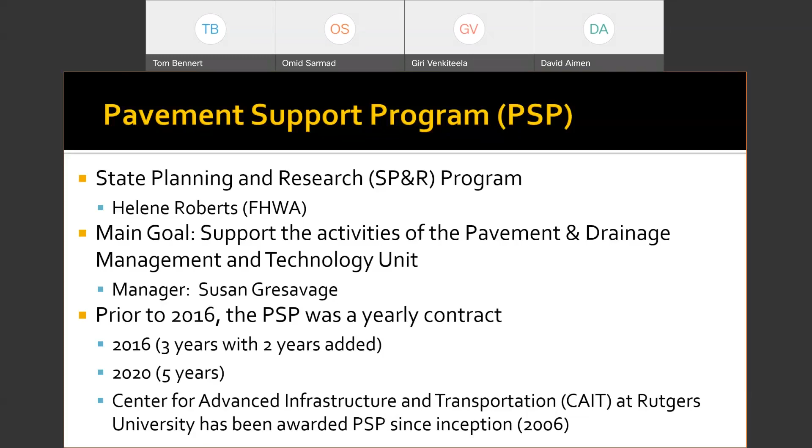As we've mentioned a couple of times, this is an extension of the DOT's services. We're not trying to push any agenda except what DOT wants and needs. That's really the idea.

We meet formally each quarter to discuss progress, but I spend a lot of time with the staff throughout the week, whether that's with Zoom calls or Microsoft Teams, or going out into the field looking at pavements and construction processes. Two of our people, John Henkin and Michael Boxer, are actually at New Jersey DOT two to three days per week, working with the staff intimately to make sure everything we're doing meets their needs.

When we talk about deliverables, a lot of these come in the form of technical memorandums completed upon a subtask. We've got seven major support tasks here, but within each one we have subtasks, so we may have three different mini projects going on in innovative materials within one year. As these things get completed, we're immediately providing information to the group so we can make very quick decisions.

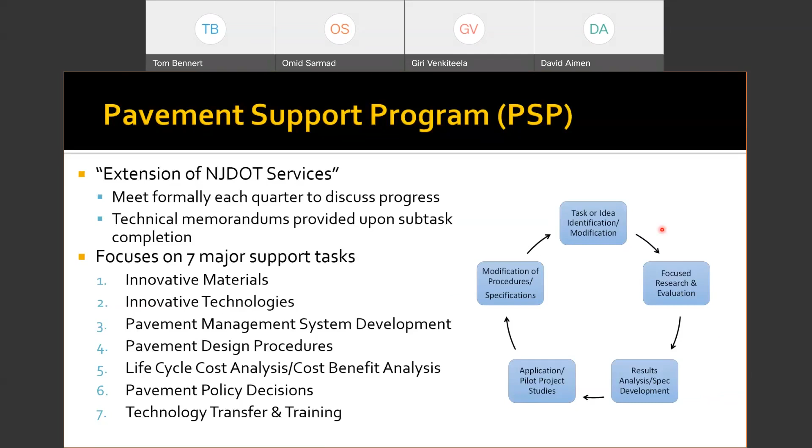And then we go back into this cycle again - this is a never-ending process. We're always looking to improve, always looking to make things a little bit better, always trying to see how specifications can progress, because as we all know, the industry is quickly changing. Material processing is changing, construction practices are changing, analysis programs and computing power are changing. So all of these allow us to continue to progress.

You see this trend on my kids' TikTok or Instagram or Twitter, how it started, how it's going.

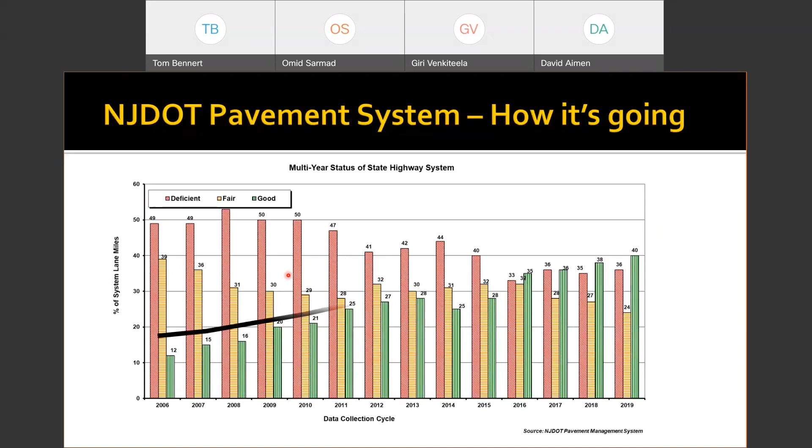And then you move forward to see how we're doing now. What you'll see is a nice increase, a nice improvement over this time period. Again, looking at where we were at 12% good, up to now at 40% good, and constantly moving that up.

You can see here in these last 4 years in particular, we've actually had more percent of the pavement network that was in good condition than in poor or deficient condition. A lot of that has to do with some of the work that we're doing, some of the philosophies that we're helping New Jersey DOT implement and move forward. I can see this constantly going upward with how things are going.

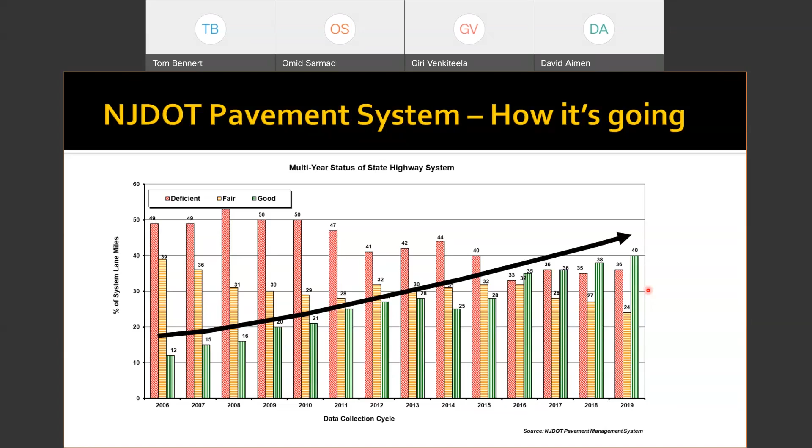Very proud of this particular schematic because, from a research perspective, it really shows whether these programs that New Jersey DOT utilizes work. I think this shows a lot of evidence that what we're doing is making a big impact in the state. From working with this program for this number of years, this is one of the biggest takeaways that I am very proud of, and it clearly shows the impact and value of these sort of programs.

Okay, so let's get into some examples of what we're talking about here. We're going to bridge a large gap going from materials to training. I'm going to try to give you a quick flavor, almost like a beer flight, giving you a little taste of everything—an idea of what we've done, what we're working on, and what we're moving towards in the future and in the coming years.

So what's innovative materials? What exactly are we talking about here? Well, the idea behind innovative materials is we're looking to develop new specifications for quote-unquote 'new' construction materials. I put that in quotes because sometimes new may actually mean recycled—taking something that's old but finding a new use for it. So we're looking for new construction materials that are going to improve the life of our pavements.

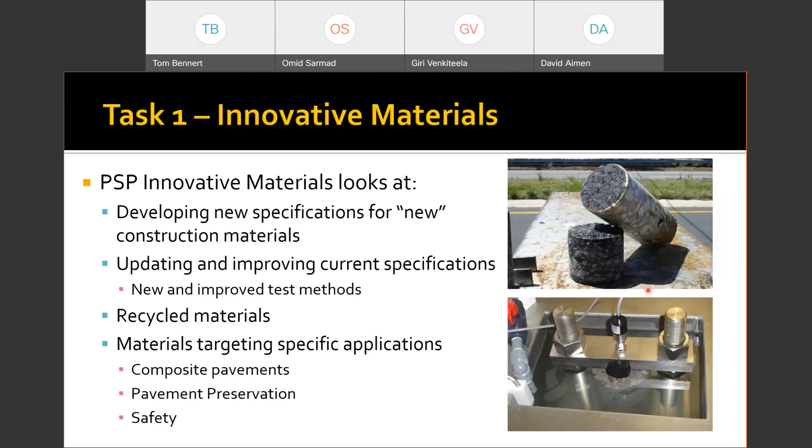Sometimes we target specific pavement areas, such as composite pavements, which we'll talk about in a bit. Sometimes we target certain technologies like pavement preservation, where we're targeting better materials to preserve our pavements. And sometimes we're targeting areas directly related to safety and how we can improve the safety of our roads. So we're looking at not only developing new materials, but how we can improve existing ones—that's really what the innovative materials task circles around.

Just some examples of some of the stuff we've done. Since about 2006, what we've been doing in New Jersey is pushing the use of what we call performance-based design. What that really means is that historically asphalt and concrete are designed based on volumetrics—how much asphalt can I get within a gradation to ensure I also have a certain amount of air. This is important based on historical information: if we meet certain volumetric criteria, the material should perform well. But we know that with the advent of a lot of new additives, materials, and production practices, these volumetrics don't necessarily hold.

So what we've done since 2006 is develop a series of performance-based materials targeting certain critical areas. For example, over here on the left, we have what we call HPTO, a high performance thin overlay. That's a pavement preservation type of material, goes down 1 inch or less, but adds significant improvement in structure, flexibility, and durability over the pavement while sealing it. It's a very good mix that requires performance testing to make sure it's both rut resistant and crack resistant.

We also have a bridge deck waterproof surface course mix. The intent, again, is to preserve our bridges. The benefit of this material is that you don't need an underlying waterproof membrane—this acts as that on its own. And because it's placed at about 1 inch thick, you can typically reduce the dead load weight of bridges by about 50% if you're going to use an asphalt overlay.

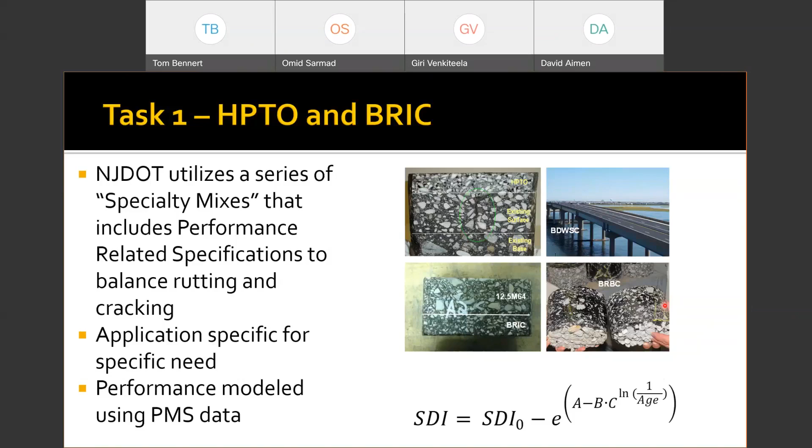So here's our high performance thin overlay. This was the first project ever placed, on 295 down in South Jersey. The material, I believe, lasted 10 years before it was actually pinned between a north and southern construction project, so they decided to take it all up in one shot, but it performed exceptionally well.

We've looked at what drives performance, the factors to watch such as materials, things we can recommend to inspectors while they're out on the job. But also, looking within the pavement management system, we can see that this material increases pavement life over 5 years greater than our typical hot mix asphalt overlays, our typical mill-to-pave process. Those 5 additional years means you can allocate money elsewhere.

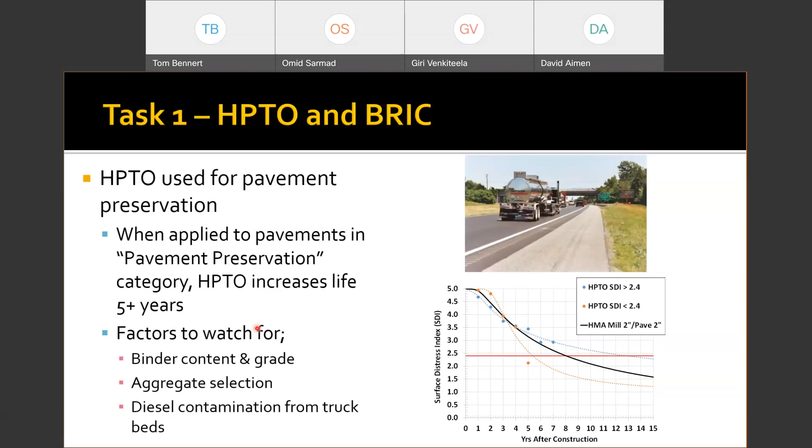We're finding that, as long as we're putting them on sound pavements, they perform rather well. Obviously if you put it on garbage, you're going to get garbage. We've done similar work with our other materials, such as bituminous-rich intermediate course and SMA.

For those who may not be aware, although New Jersey looks like it traditionally has mostly asphalt pavements, over 60% of the network owned and operated by New Jersey DOT is what we call composite - an old concrete pavement with asphalt on the surface. That presents a very significant design challenge because of the movement around the joints and cracks.

So what we've done through research is verify and validate what we call a system approach, where we use a 3-inch overlay over top of these composite type pavements - 1 inch of the bituminous-rich intermediate course on the bottom and 2 inches of SMA over top of that.

We've found that by using this approach, we can improve the life of composite pavements by over 8 years. In some cases, looking at the data in some pavement sections, we've had to extrapolate that data out even further because the performance has been so good we haven't seen deterioration.

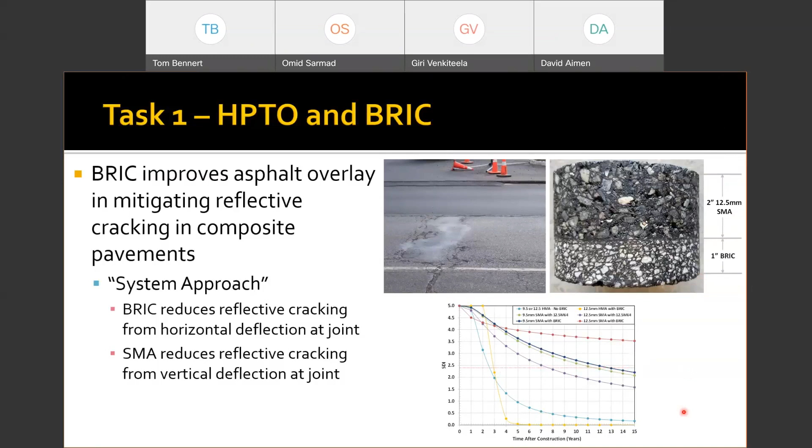The same goes for what we call SMA, stone matrix asphalt. It's something industry could be a little opposed to at times - there's a higher cost per ton, we're not using or allowing recycled asphalt pavement there, and you really have to pay attention to the details.

Because if you don't, the construction process can be a little bit challenging. But what we found, going back into the pavement management system, is that when we're putting these on flexible pavements, now non-composite, putting them on traditional asphalt pavements, you can see the improvement in life over your typical dense graded mix, whether it's a 9.5 or 12.5 millimeter SMA.

We're talking 5, 6, 7 years easy of a life extension over these pavements. What New Jersey DOT typically is doing after a certain amount of service life on these is actually going back out and preserving them with some sort of a preservation treatment. They're lasting that long and performing that well.

So again, going back and verifying, so these technologies or these materials were developed, the specification was out there, going back, continually monitoring them, seeing if we have to change anything, but then always looking at the performance to make sure that we're moving forward.

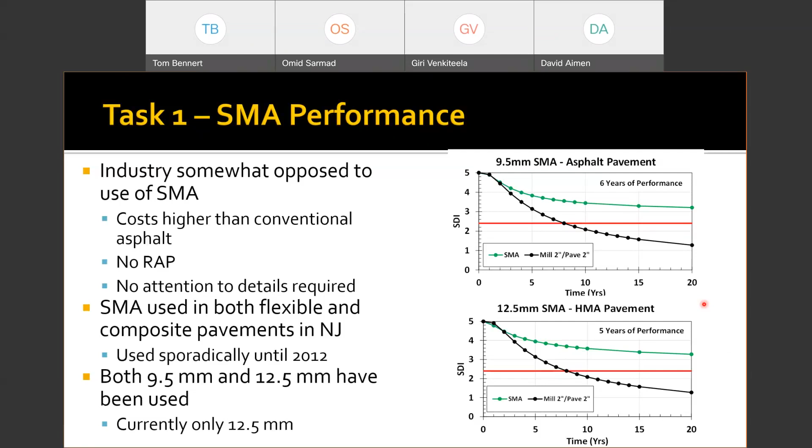Again, we talked heavily about recycled materials. This was a particular project where New Jersey DOT had allowed the use of what they call recycled asphalt shingles, as long as they were what we call post-manufacture. Now, for those of you that have never heard this before, recycled asphalt shingles, or asphalt shingles in general, have about 10 to 20% of asphalt by total weight.

They also have some fibers in there, and some coarse sand, some granular sand in there. But they have about 10 to 20%. So there's a possibility of including these in an asphalt mix because of the compatibility, or somewhat of a compatibility, between the binders.

There are some significant differences, though, when we talk about the asphalt, because the asphalt in these shingles are much stiffer, and they're modified in a way so obviously when it's very hot out, that asphalt doesn't drip down the side of your house. So the stiffness of these materials is much different than what we would conventionally use.

At the time, there was a little bit of pressure on the New Jersey Materials Bureau to take a look at this again. It was in the specifications, but people hadn't used it in quite a while. So we went back, took a look, did a research study looking at this proposed AASHTO method that they were proposing.

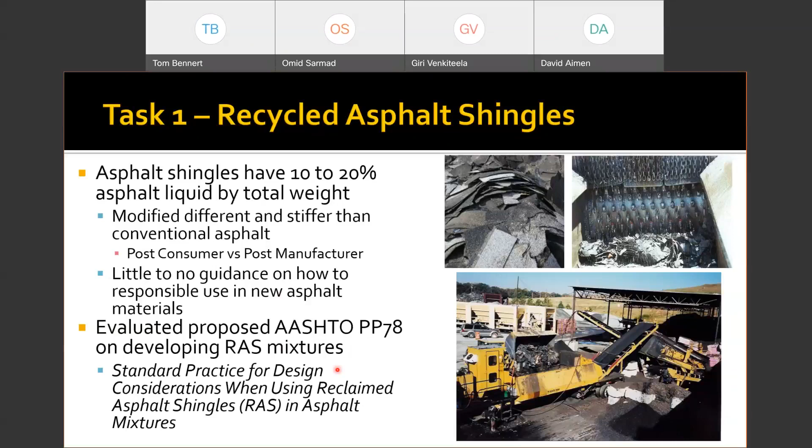The idea here is, can we actually responsibly use recycled asphalt shingles in new hot mix asphalt? We looked at a surface mix, we looked at a base course mix, could we put it deeper in the structure? We looked at the rutting, we looked at the cracking, and what we found was that the stiffer binder improved the rutting resistance, but it promoted cracking.

And it promoted cracking to the extent where it really wasn't even close to our conventional type mixes. Now, that doesn't mean that these products still can't be used, but you're going to have to significantly modify the way that we currently treat our asphalt mixes by using what we call rejuvenators, using some sort of a chemical package to soften the asphalt binder in the shingles.

Again, looking at a softer asphalt binder. And mind you, this is really only for the manufactured waste, the waste product that comes from the factories. Currently, the New Jersey DOT does not allow post-consumer or tear-offs, old shingles from housing, because of the possible asbestos that might be in there.

Again, we're going through this study. We were looking at both products. The post-consumer had testing done on it to see whether or not there was asbestos in it, but both products are still too stiff to be used just as is without significantly doing a redesign of some kind. So in this case here, this was an instance where we were looking at a recycled product, but it just didn't work. At least it didn't work under the current system without some significant modifications.

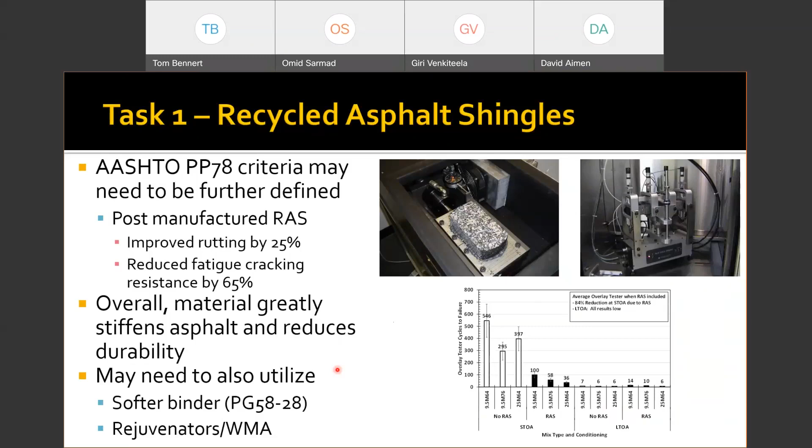We look at here's a product for safety called a high friction surface treatment. And this is something that is becoming popular for horizontal curves in trying to reduce fatality accidents of people actually, unfortunately, leaving the travel lane.

Some really interesting statistics: there's approximately 5% horizontal curves in all U.S. roads. About 5% of all the roads make up these horizontal curves. But when you look at the rate of fatalities, it makes up 23% of all fatalities nationally. That's a significant amount of fatalities for a small portion of the pavement network around the country.

In New Jersey alone in 2016, there were 336 fatalities due to lane departures on these particular areas. So these systems trying to maintain friction in these horizontal curves have become a serious topic recently.

One way of helping this is a product called high friction surface treatment, developed during the Every Day Counts initiatives by Federal Highway, I believe Every Day Counts 2 or 3. To simplify, what we're doing is taking a very hard angular stone, calcined bauxite, and gluing it to the pavement.

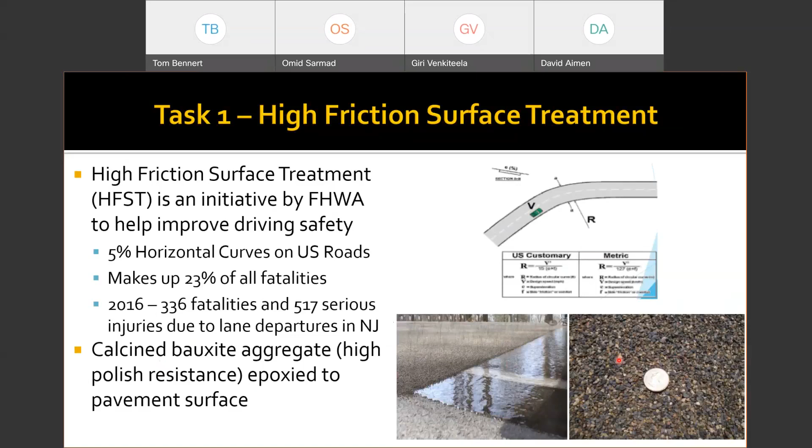There are other specifications that go along with it. It has to maintain a certain skid resistance. But in the general design process, the recommendation is to place it on pavement in good condition. The problem is, what is the definition of good? We can pave a brand new road tomorrow, but we can actually make that asphalt feel very old.

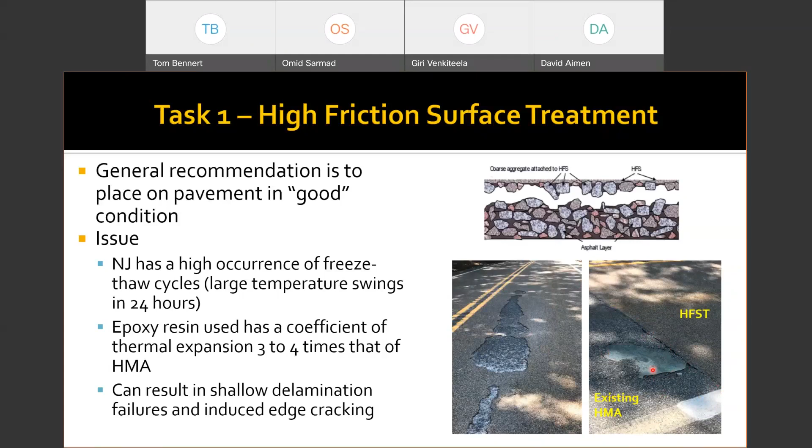So we looked at a number of different pavement sections that had HFST, both good and poor performing, and we accomplished two things in this study. The first was to design a pre-screening protocol that can determine whether asphalt pavement sections are good candidates for epoxy resin HFST.

The second thing we did was develop a high friction chip seal product that we're evaluating. There's a section of it on Route 68 right now, and we're looking at a couple more applications around the state where, instead of an epoxy resin, we're using a heavily polymer modified asphalt binder to do the gluing, something more compatible with the asphalt pavement.

So we're looking at these other alternatives, again looking at existing specs and how we can continue to improve them. In this case, although the intention of this specification was good, conditions in New Jersey may not lend itself to being applied universally across all pavements without some sort of pre-screening being done.

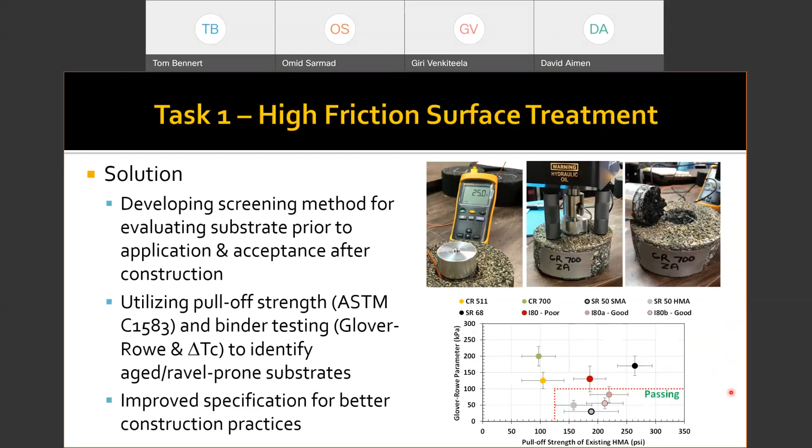Things that we're going to be looking at moving forward - something that's very hot in the industry right now - recycled plastic. We've got some work going on right now and potentially a pilot, so we're moving forward on that.

Electric arc furnace slag, another recycled material. This material can be produced into an aggregate form. Slag has generally been known to be harder, a little bit more angular, and a little bit more abrasion resistant. So can we use some of this material in asphalt applications?

Implementing new design procedures, something called balanced mixture design, which is on the asphalt side, again incorporating performance tests. And also looking at central plant cold recycling, where we bring essentially a portable asphalt plant to a location, mill the material, the RAP from that job, reprocess it, and essentially put it all back. It's basically a 100% recycling system.

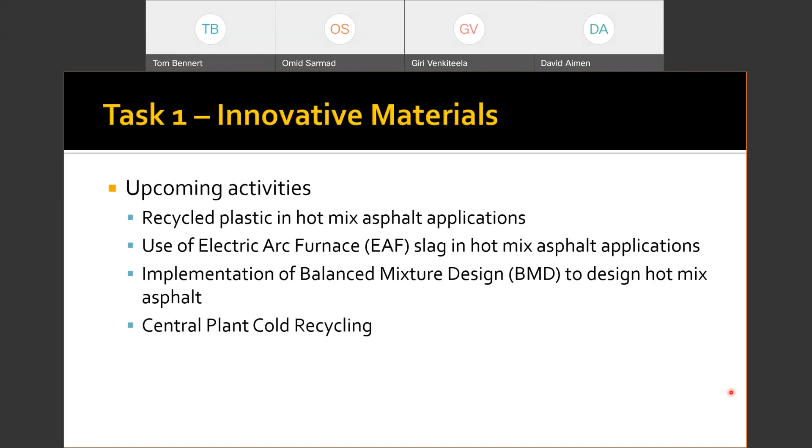They've been used in a number of projects down in Virginia. We had a nice presentation from the folks down at Virginia Transportation Research Council on this, and it's something we're looking at trying to pilot soon in New Jersey.

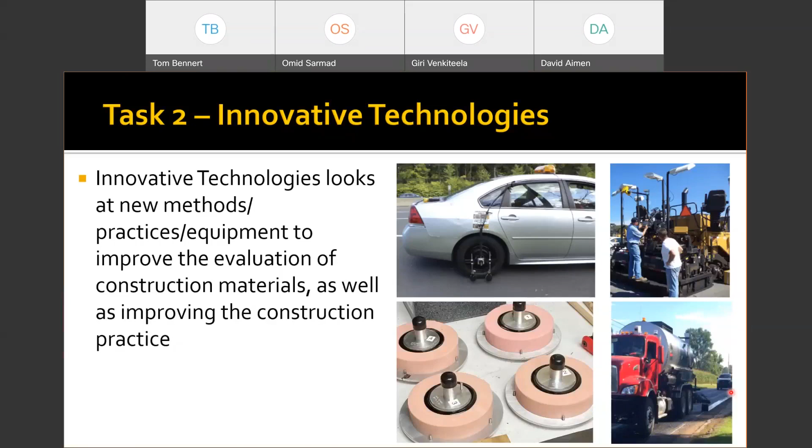We talk about innovative technologies, and again this is task 2 of the PSP. In innovative technologies, what we're doing is looking at practices and equipment that can be implemented to improve the evaluation of construction materials, as well as improving construction practice in general - really seeing how we can improve the way things are made or how we evaluate our materials.

First thing I want to talk about on the construction side is longitudinal joints. A longitudinal joint, if you don't know, is we pave in a longitudinal manner along the length of the pavement, but we can't shut off an entire road. So what ends up happening is we pave one side and then pave the next side a couple of days later. That edge where we pave up against that cold new edge is what we call a construction joint, or in this case, a longitudinal joint.

The problem is that during these freeze-thaw cycles, you really start to weaken that joint up, and you start to see it fall apart - that on top of any sort of moisture damage. What you end up having is you almost have to rehabilitate a pavement, not due to premature failure of the material, but due to the construction practice itself.

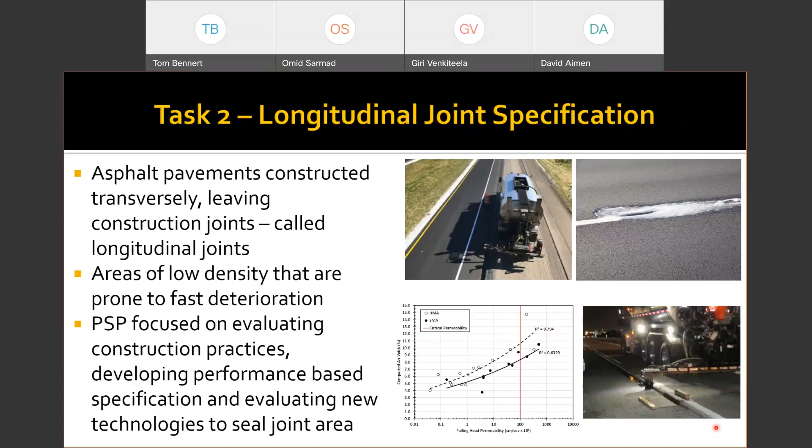Unfortunately, at the current moment, there's not an existing way to necessarily improve the construction of the joint. So what we're trying to do is figure out a way to best seal that joint up without creating a significant change in the whole construction process.

Pavement bonding is extremely important due to the way we construct asphalt pavements, or pavements in general, which are built in layers moving vertically upward. So if I'm going to take off the top 2 inches because it's distressed, I would mill 2 inches off, then place 2 new inches on there.

So the idea is to make sure we get bonding of these layers to reduce this slippage, to reduce this potential for premature failure in that surface area.

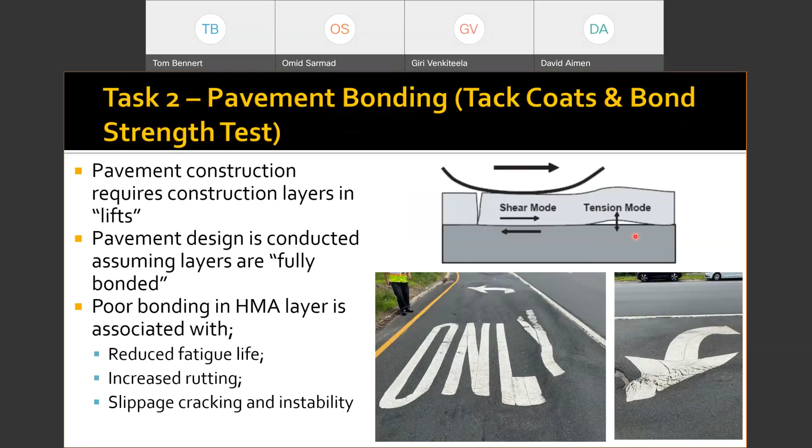You can see they measured a half inch of deflection with that 60-pound load. They then took the same sheets of plywood, nailed and glued them together, allowed it to cure and harden. After that, they put weight on it, and had to increase it up to 160 pounds just to get a quarter inch of deflection.

Now it's the same wood, same thickness. The only difference is that in one situation they were completely unbonded, and in the other they were fully bonded. This is a great analogy for asphalt pavements - if we don't get that bonding, we get a significantly greater amount of deflection that these materials really should not or cannot withstand in most cases, and in doing so, we get premature failure.

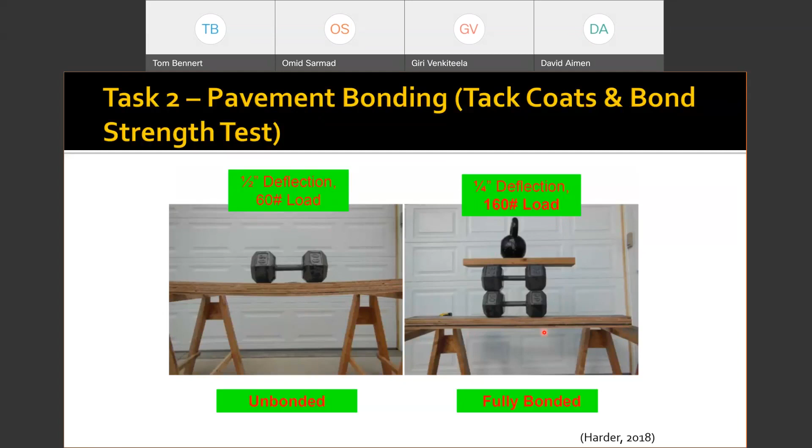So there's a couple of ways we're looking at researching this now. One is to find a way to better characterize the materials we use to bind these layers together, which are called tack coats.

Historically, they've been used in what's called a penetration test, where we push a needle into a sample. The deeper that needle goes in 5 seconds means it's soft; the less it goes into the material means it's hard. There are certain requirements needed for what we call tack coats, but by no means does whether this material is hard or not dictate how it's going to perform in the field, how it's going to bond.

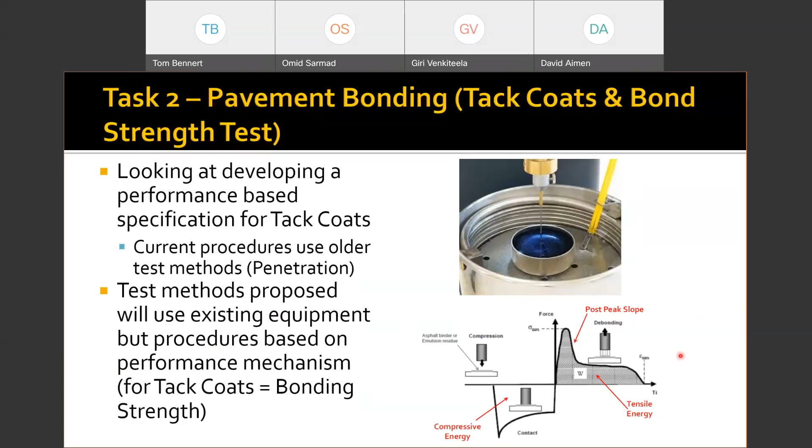So we're actually looking at better procedures. We're looking at what we call bond energy, which is more of a pull-off type of test that can be used in existing equipment. There's actually an ASTM procedure being moved forward on it, and this methodology has been shown to differentiate between different material types at different temperatures.

What we see here is the DSR, the dynamic shear rheometer we use for binder characterization, pulling upward and pulling the material. In this case, this was a polymer modified emulsion, and you can see the material looks like it's stringing or stretching - it almost looks like chewing gum in the summer.

This test method has the ability to better characterize our tack coat materials. So that's one important thing - we can go ahead and specify better materials that are going to bond better.

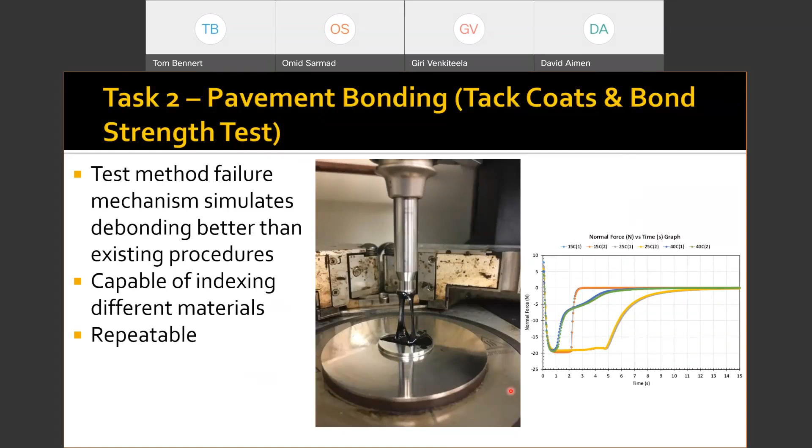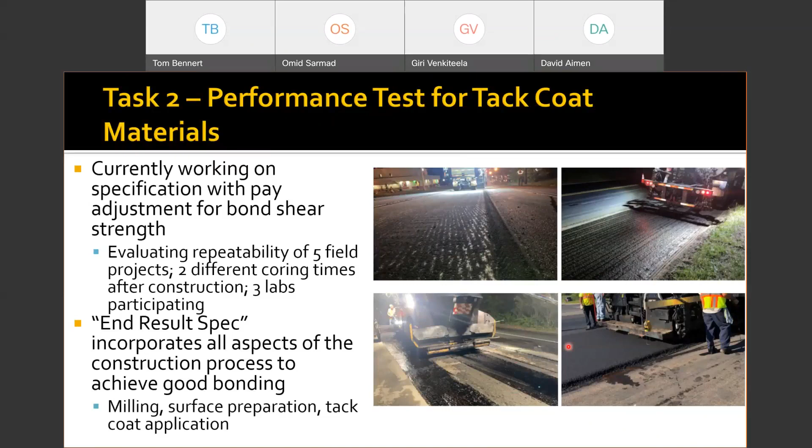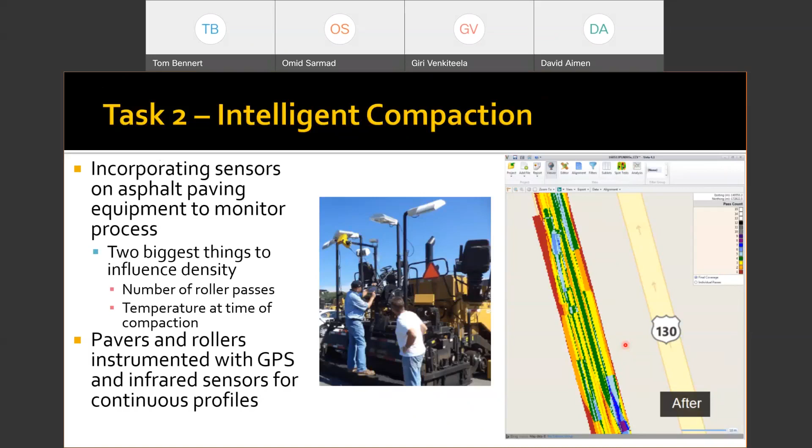The more passes you have, the more chances you have to better compact the material, and the less likely you are to get poor in-place material. Because the lower the density of the material, the higher the airvoids, and the more likelihood you're going to get accelerated aging. So we look at these things and combine the number of passes with the infrared to get an idea of passes versus density.

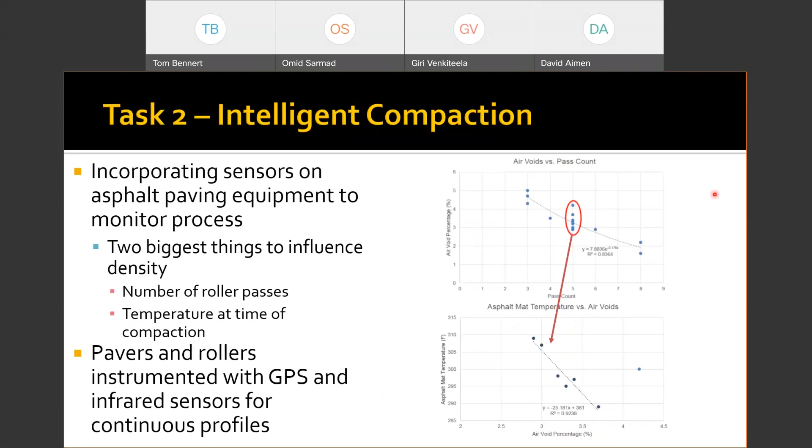We can look at how well these pavements are being constructed, and equipment operators can look to see where they've gone and where they have to go. We can explain anomalies like this, where at 5 passes we have airvoids between 4.5 to almost 2.5%, but that was simply because of the difference in temperatures we're seeing on the pavement. So we can look at combining these technologies to help improve our construction.

We also look at noise, how noise is generated from the pavement surface and tire - obviously something very important, since we've got a lot of residential areas built up along our highways.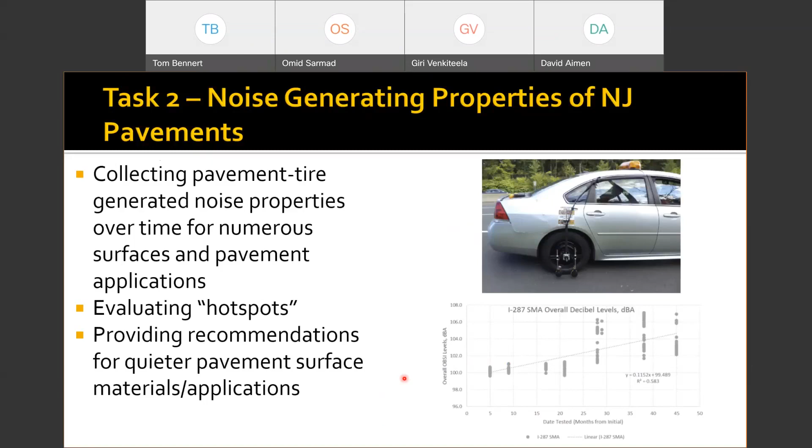So we're looking at measuring pavement noise and seeing how it changes over time. We've been doing this for a number of years now and have a large database. We're looking to see how different materials behave over time, and whether some pavements are getting louder than others over that same time period.

Other materials or technologies we're looking at and coming up soon include different ways of characterizing the asphalt binder and mixes, trying to get a better idea of how these materials are performing, including performance testing during production, incorporating sensors on New Jersey DOT fleet vehicles to help us get an idea of how our roads are performing, and looking at texture measurements to help predict friction and skid properties.

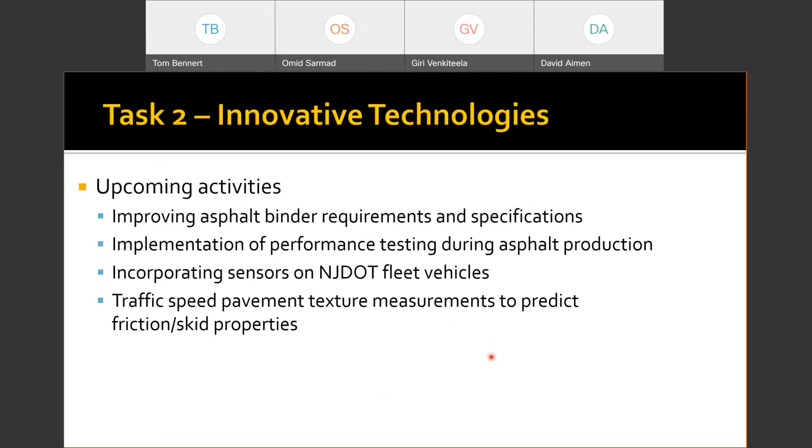Skid resistance is something that's measured, but it can be very costly to actually run and maintain the test. So can we do this at traffic speed using texture instead? This way we don't have to disrupt traffic at all.

Task 3 is pavement management. A lot of the work we do here is to assist New Jersey DOT with the collection of their data, the quality control and analysis of the data, and then using that data to help make decisions.

The idea with most of pavement management is: should I leave it alone? Should I invest a little bit of money in pavement preservation? Am I going to have to do some rehabilitation, which is a bit more costly? Or am I going to have to go in and do some major reconstruction? And then within those areas, we have to decide what type of materials we're going to use.

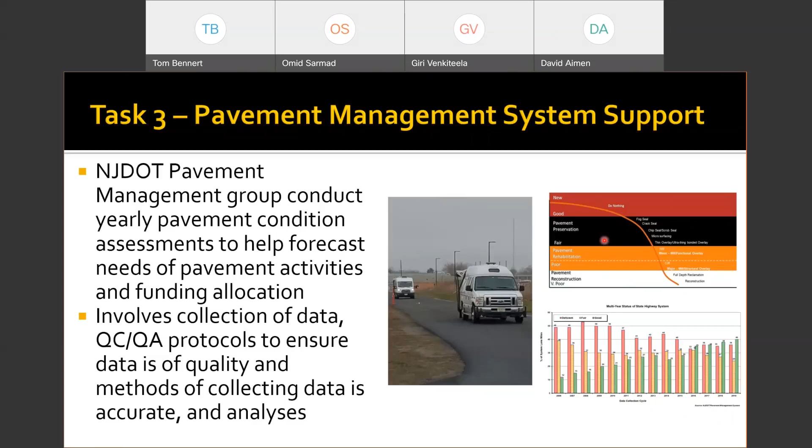So it's collecting the data, analyzing it, making sure it's quality, and then using that data to help make decisions—not just now, but also to predict how that pavement will perform in the future so we can allocate further out. Things such as condition forecasting, where depending on the budgets provided, we figure out how to properly utilize the money to make the pavement system look and perform better.

So we go through a lot of these budgeting scenarios, looking at whether or not we should use pavement preservation, how much pavement preservation, or whether we should look at larger rehabilitation projects. We do a lot of these simulations depending on the data coming in and the cost of these programs.

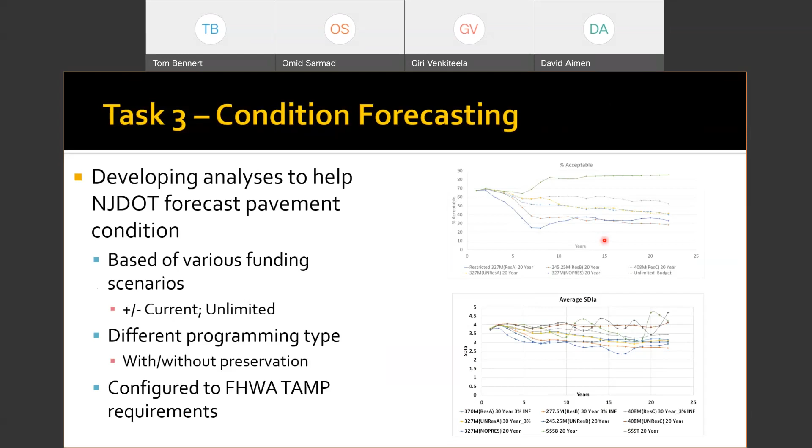The PMS condition and program mapping looks at different sections and tries to map them based on construction—where's construction going, what kind of pavement preservation practices do we have out there, and looking at projects that are now undergoing rehab and construction.

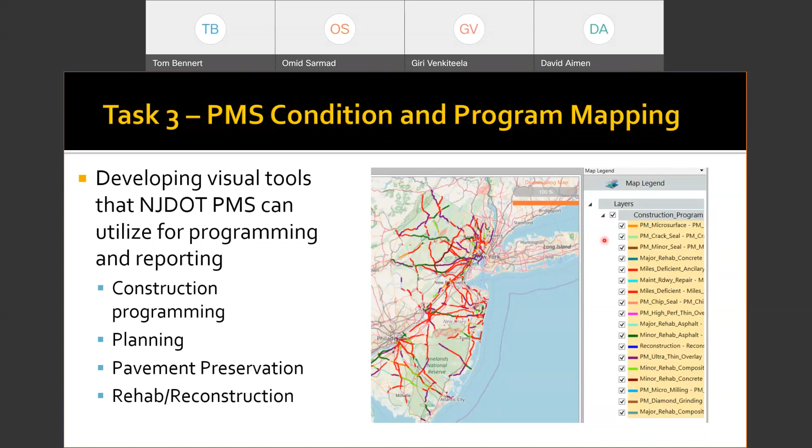We're currently looking at mapping out noise, seeing where there are hot spots along the pavement. So we're looking at mapping programs and mapping capabilities of the data, taking the data in and putting it together so we can get a better visual idea of how things are performing out in the field.

Looking at automated distress—this has been very popular in the past couple of years. In the past, New Jersey DOT actually rated the pavements visually, having people behind the wheel. Obviously the person behind the wheel isn't doing the rating, but other people are in the car or van actually rating the pavement as they drive over it at traffic speed.

But now we have systems where we can use downward and forward viewing cameras to actually pick up these cracking distresses. We can take those distresses and index them in a more accurate way than what we were doing before, just with our eyes. We can actually get low severity cracking with some of these systems, something we weren't able to do before. So we're moving over completely to more of an automated distress type of mode.

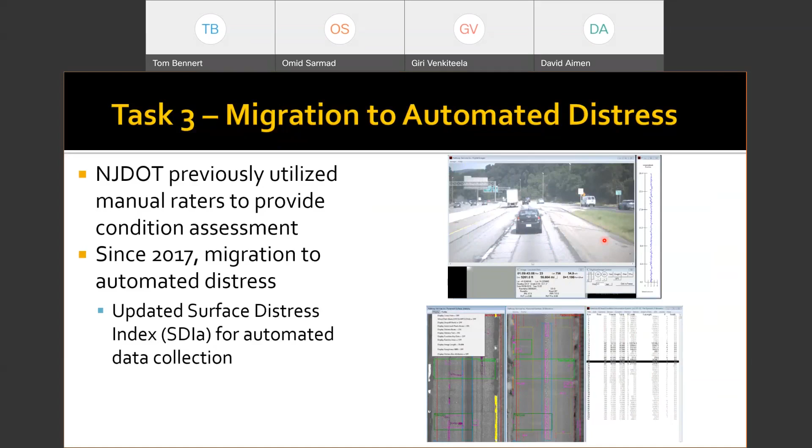We've also, in the past couple of years, developed and are currently maintaining calibration sites for New Jersey DOT equipment. On the upper right here, you can see their pathway vans—this is the network data collection system they use with the downward cameras, the rut bar, looking at smoothness. On the bottom right, that's over at their Sea Girt facility in New Jersey. And this is an out-of-service rest stop on 287.

Here we're using the walk-behind SurPRO profiler that we use for bridge deck acceptance. We do a lot of this—we're able to find these locations with New Jersey DOT, go out there, index these locations, and then utilize them for equipment verification.

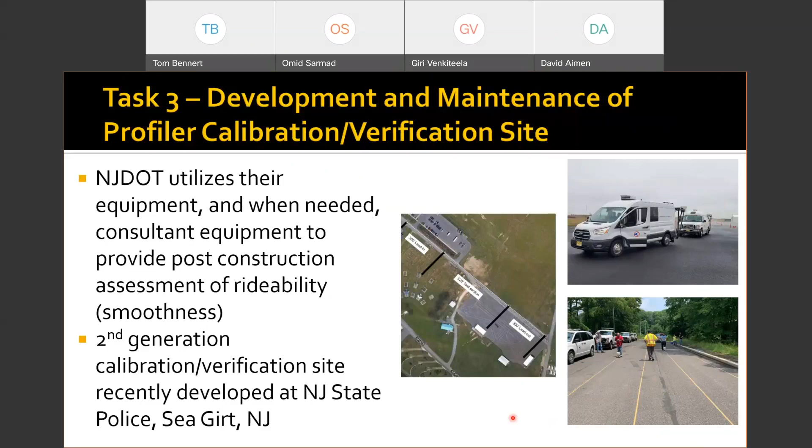So New Jersey DOT equipment goes out there on a schedule to make sure that it's calibrated properly, and even to the point where at times we bring in consultants that have similar equipment that New Jersey DOT contracts with to help support their activities to make sure their equipment is calibrated and matches New Jersey DOT.

Upcoming capabilities here. I apologize, I'm starting to talk a little faster as I see I'm hitting close to that 1 o'clock mark. We're looking at combining databases of materials and pavement management design so we can see the interaction between materials and performance.

We're always looking to continue to enhance the equipment calibration sites that I just showed you. That's a constant effort, constantly moving on that. Incorporating GIS models, improving and processing our QC/QA processes, trying to speed those up so we can get data into our pavement management system sooner to make better decisions.

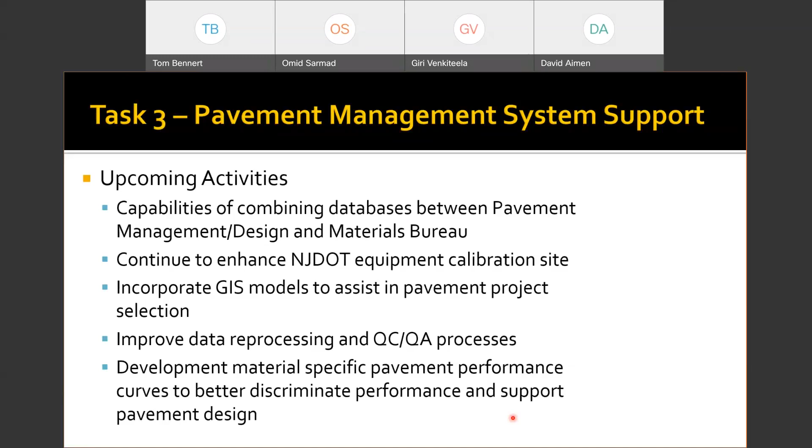And then looking at developing material-specific models. Right now, in most state agencies, we currently just determine asphalt and concrete as separate materials, but we want to separate them even more. What type of asphalt, what type of surface? So we're looking at material-specific modeling now.

Task 4 is pavement design. And again, the idea here is we're in a whole new world with regards to pavement design. Up until, honestly, and there are some states still doing it, they're using the system from the 1960s AASHO road test. And it was AASHO, I didn't forget the T, they didn't have the T in it back then.

This was a series of roads that they produced in Illinois and had known traffic driving over it, and they measured the distress of the different sections. And then they developed these nomographs where you were able to determine how much thickness you needed based on equivalent damage of the different pavement sections.

So you knew what your traffic was, what kind of reliability you were looking for, what sort of supporting stiffness material you had, and then you came up with a thickness, or really what you needed was a structural number, and you related that to thickness. Again, archaic in the way that it was done.

It was all based on statistics, based on traffic and information back in the 60s. What it doesn't do is allow us to really look at how the material is performing. And now with the advent of computer speed technology, we know how to better characterize our pavement materials.

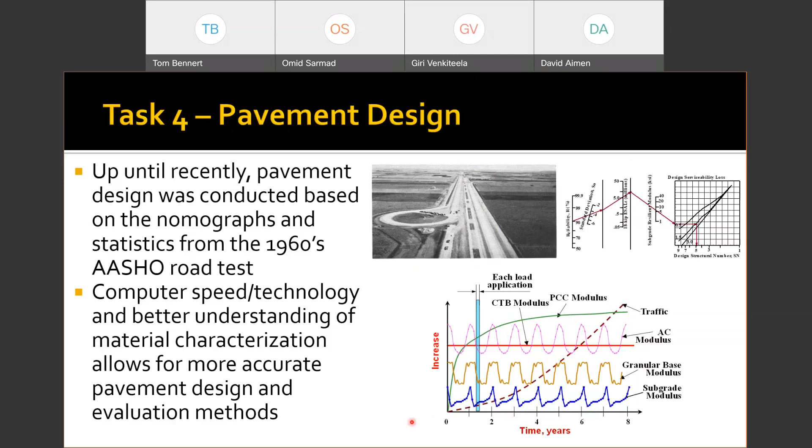But now, with the computing speed and better understanding of these materials, we're able to better model them. And that's in a new design methodology called Pavement ME, ME standing for Mechanistic Empirical. And what we've been able to do under this program, under the PSP, is start to go with the loading.

We get the traffic information from the state DOT and simplify it, because the older design wanted the equivalent single axle load, your ESALs, but now what the new Pavement ME wants is the information that made up the ESAL. What was the axle spacing? What was the tire pressure? What was the axle load? What was the vehicle class type?

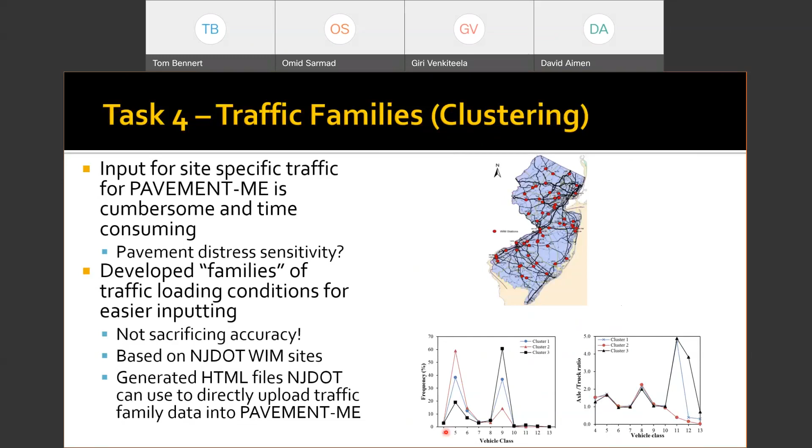So we've been able to consolidate this down into what we call traffic families, which represent different areas of New Jersey to make it simpler for New Jersey DOT designers to actually utilize the loading conditions. We also go ahead and develop material catalogs so we can design pavements ahead of time. You know, the problem is we do a design and then it gets constructed years later, and we don't necessarily know what the materials are going to be.

This catalog now allows us to get a better idea of what representative material properties are going to be. We take existing materials, break them down, take the asphalt off, look at the gradations and material properties, how they perform, and provide data that can be directly uploaded into the program so designers can better represent the materials that are going to be out there.

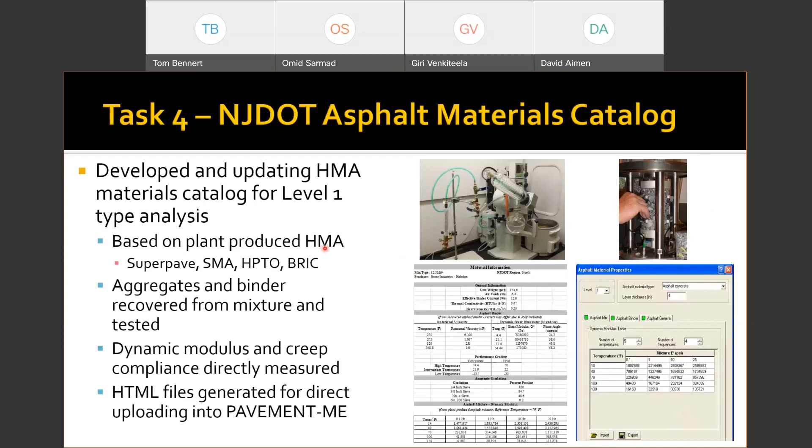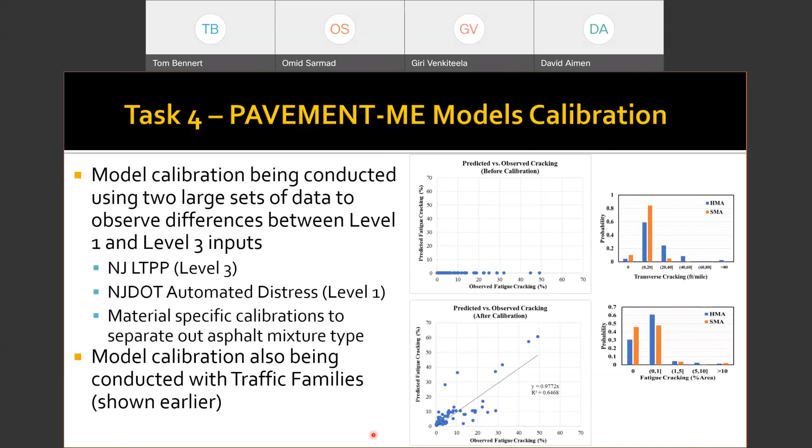So we're looking at how different materials handle, and we are actually coming up with different calibrations for different asphalt material mixes. We're looking at different calibrations now for our typical polymer modified materials, our neat asphalt materials, and now also our stone mastic asphalt, SMA, because it's being used on so many different pavement surfaces around the state.

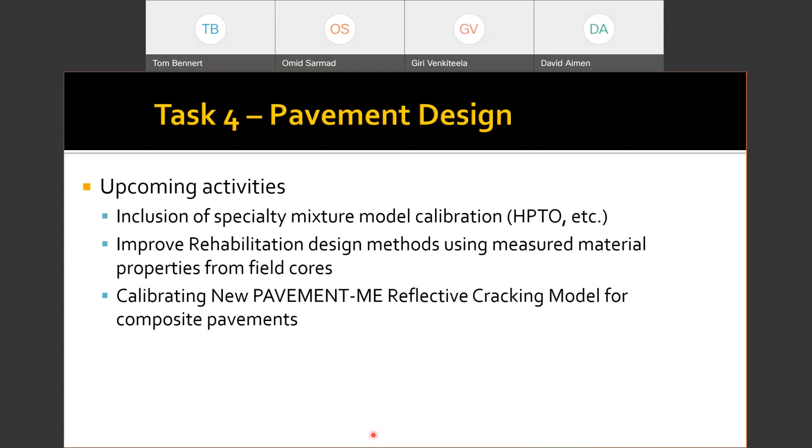We've got a lot going forward on this as well. We're including specialty mixtures in our modeling calibrations. We're looking at improving our rehabilitation design methods to actually measure material properties from field cores, taking the specific layer information, and calibrating newer models in the pavement program, such as the reflective cracking model, which is important for us considering we have such a large amount of composite pavements in New Jersey.

I only have another 70 slides left, Omid, so I should be okay.

Task 5, life cycle cost analysis and cost benefit ratio, is an area we look at. The idea here is what's cost effective. If we select a material and it gets us another 5 to 10 years of pavement life, that's great. But if it costs 1,000 times the amount of something we'd typically use, it may not necessarily be cost effective.

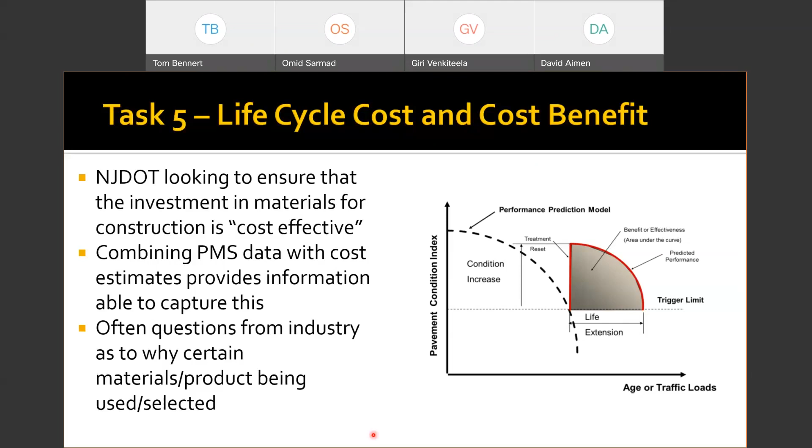So how can we go about looking at this? Can we look at cost benefit analysis programs, trying to figure out what sort of life extension we can get, and then look at the costs associated with that. We've been able to do that with pavement preservation techniques, looking at microsurfacing, crack seal, mill and pave, and come up with analyses of what are better treatments and at what particular time those treatments should be used.

If we use them too late, we're not going to get as much life out of them as if we use them sooner. That's why the general public at times gets confused. We go out, pave a road, and 3 or 4 years later we're doing a pavement preservation treatment on there. It's not that the road's in bad shape - we're putting a preservation treatment on there because the road is in good shape and we want to keep it that way for a lot longer.

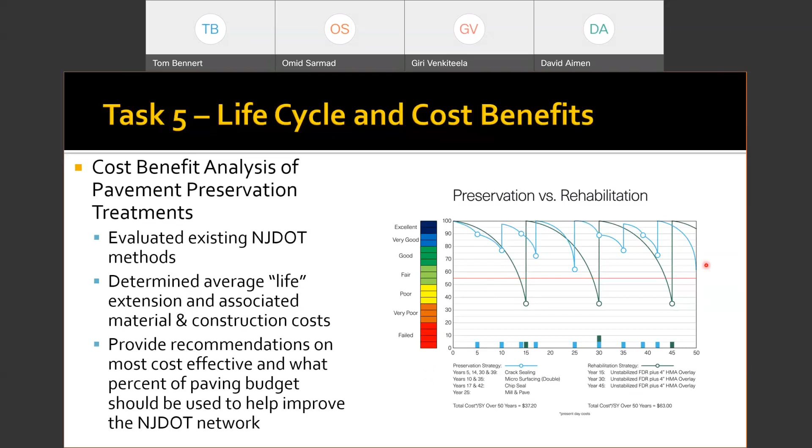So those pavement preservation techniques, even though it looks like we're doing them more frequently, allow us to avoid reaching the threshold where we have to start worrying about a rehabilitation.

And we also do that for materials. There was a lot of initial talk about these specialty mixes needing performance testing - is it worth it? We went back and did a cost benefit analysis and showed that all the materials we're using have an increased benefit ratio over typical asphalt, because the extension of life is much greater than the difference in additional cost of these materials.

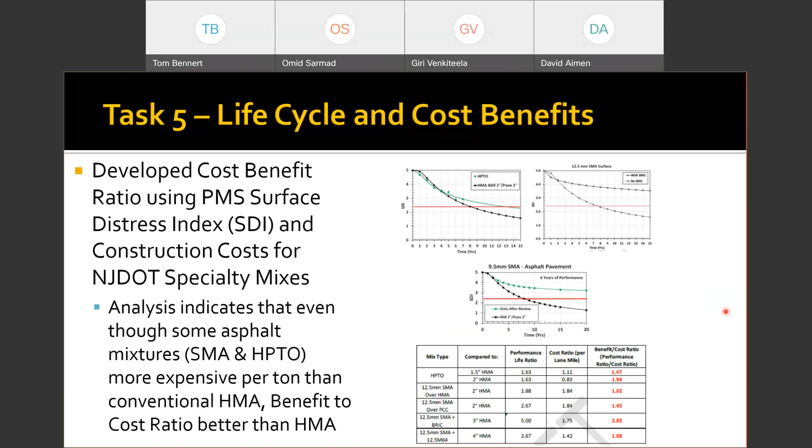We've been doing that for a lot of our specialty mixes that require performance type testing, which industry may not always prefer to use. In task 6, we look at things that affect pavement policy.

What are some areas that we could possibly be working on that may change our practices completely—whether that's pavement preservation or the onset of autonomous vehicles? These are usually done in a white paper format where we conduct surveys and literature reviews, then come back to New Jersey DOT and report what we found about a particular topic, whether it should be used or how other states are currently using it.

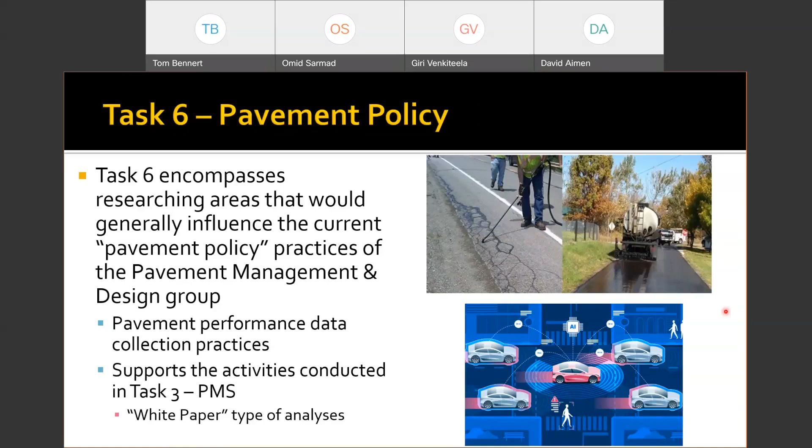One manufacturer came out and ran a couple of days' worth of pavement sections. The idea is that it gives information similar to going out and looking at the structure, similar to a project level analysis. This would change how New Jersey DOT currently does things—doing a network analysis, identifying pavements that need rehabilitation, then a project level analysis with detailed structural review, and providing recommendations. This device has the ability to possibly do both.

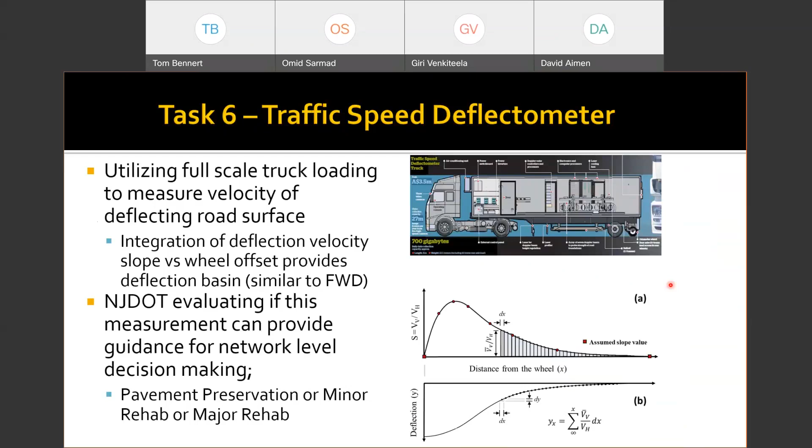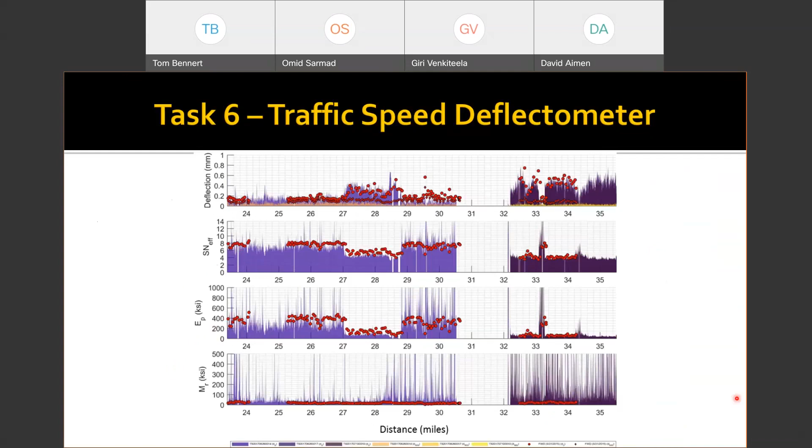We looked at ways of determining what's remaining structurally in the pavements—can we back-calculate a modulus for the asphalt, and for the subgrade and unbound materials? We can. And because of the GIS system, it allows for some very nice mapping possibilities as well.

The problem that came out of this, though, is it's not a system ready yet for composite pavements, because of the small level of deflections typically seen from this device. With over 60% of composite pavements in New Jersey, it may not lend itself to full application.

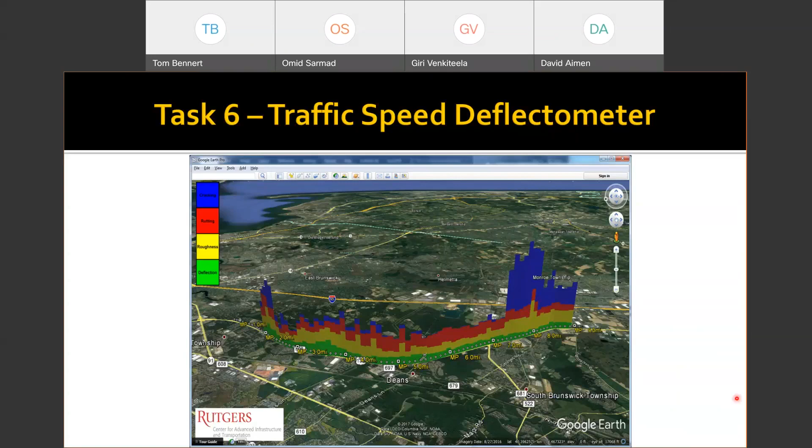We are working with the company, and it looks like they're going to come out again to run more composite pavements. They've looked at their system, made modifications, and now have better technology that allows for better measurements. So we're going to go back and take a look at this—like I mentioned earlier, we look at something and do that full circle, coming back to it. As the technology improves, this might be something used across most pavements in New Jersey.

Again, maintaining the profiler site—we developed it, we do training with it. This is a game changer in New Jersey, and it's actually needed according to FHWA TAMP regulations that require us to verify all measurements. So what we're doing is making sure New Jersey DOT's equipment is properly calibrated and that we can verify these measurements—not just one piece of equipment, but across the board, whether it's DOT owned or consultant equipment.

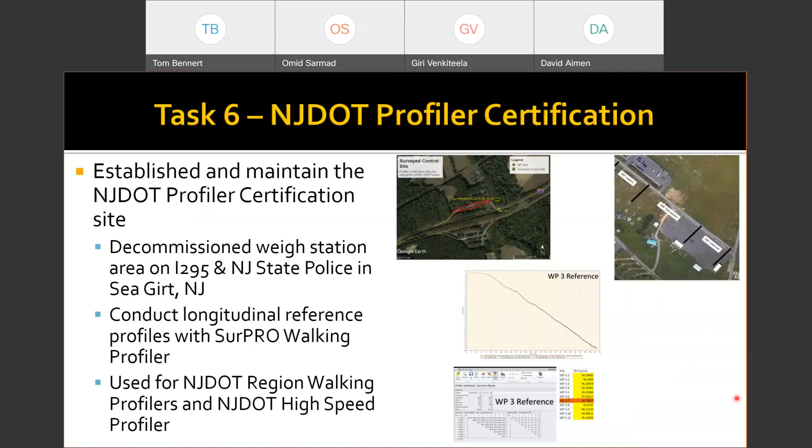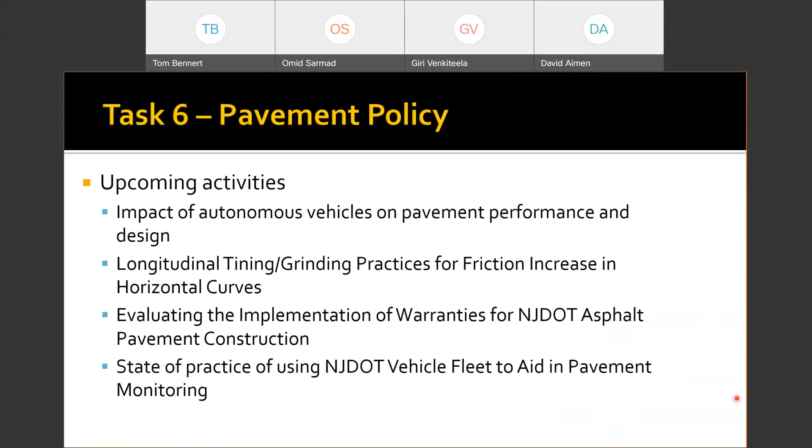Some things we're looking at down the road: whether we can use longitudinal tining or grinding practices for friction in horizontal curves instead of high friction surface treatment, and the impact of autonomous vehicles on pavement performance. As autonomous vehicles develop, how will they be utilized on pavements, and will this impact design or materials needed? We're also looking at how warranties can be used on projects to make sure New Jersey DOT isn't paying if a project goes bad—that pavements constructed have a minimum warranted life based on the contractor. And again, looking at the fleet to help aid in pavement monitoring.

Last but not least, our training activities. Again, the idea of everything we're trying to do is implementation. So not only are we taking these different subtasks, products, presentations, technical memorandums, and reports and getting them to New Jersey DOT as soon as possible, but we're also providing training for their group.

We're talking about different materials and construction technologies, going into the Materials Bureau and helping them with performance testing, looking at pavement designs, and doing training on the new pavement ME systems, PMS software, SurPRO, walking profiler training. We do a lot of training regarding high-speed profiler use and guidance, making sure that's how it's supposed to be calibrated.

There's a large training component we do with this group to make sure they're up to date with newer technologies and general practices, because that continuity is important. As there's turnover in New Jersey DOT, we have significant continuity at our research center working on this for so long that it provides a level of security when it comes to turnover, people retiring at New Jersey DOT, so there's still a place to go where we can provide that level of training for everybody.

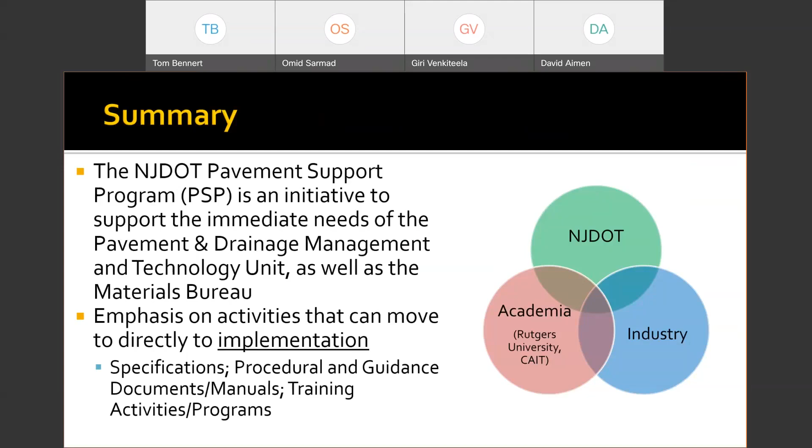That's it. I appreciate your time. If I didn't put you to sleep and you have any questions, I'd be happy to try to answer them. I apologize, we're coming right up over on that 1:15. But again, if there's any questions, I'd be happy to try to answer them as best as I possibly can. So thank you very much.